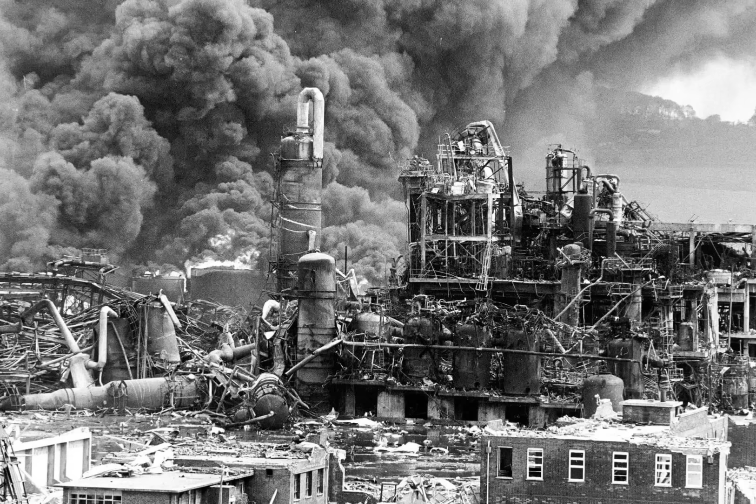Before that day, almost nobody outside of North Lincolnshire had ever heard of Flixborough, and nobody had any particular reason to. After it, the world of industrial engineering would never think about safety in quite the same way again, and the laws that protect workers and communities from industrial catastrophe across an entire continent would be rewritten from the ground up. To understand what happened at Flixborough, you first have to understand what Flixborough was.

And the answer, before June of 1974, was almost nothing. A village of around 500 people, sitting quietly on the floodplain of the River Trent in North Lincolnshire. The kind of place that does not appear on any national map of significance, that people from nearby towns would struggle to locate, that the Encyclopedia Britannica did not even see fit to mention. A flat, gray-green landscape of farmland and waterways, with the industrial silhouette of a Normanby Park steelworks rising in the distance. That steelworks is important because it is why the plant was there at all.

Since the late 1930s, a chemical facility had operated on the edge of this village, quietly producing fertilizers using gas drawn from the coke ovens of the steelworks next door. For decades, it was simply part of the landscape. Workers cycled to their shifts. The village lived alongside the faint chemical smell that occasionally drifted through on certain winds. Nobody thought very much about it.

In a photograph taken just before the disaster, a young woman can be seen walking her dog along the road that overlooked the plant. She is relaxed. It is a perfectly ordinary Saturday. That photograph would become one of the most powerful images at the disaster's memorial exhibition 50 years later, precisely because of how unremarkable it is.

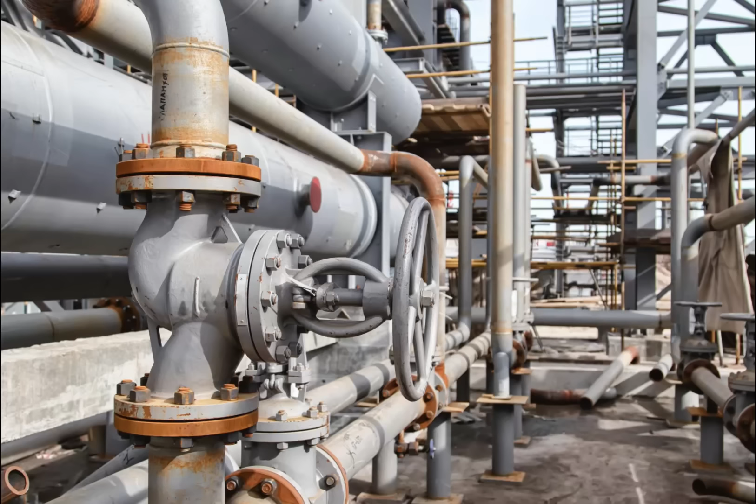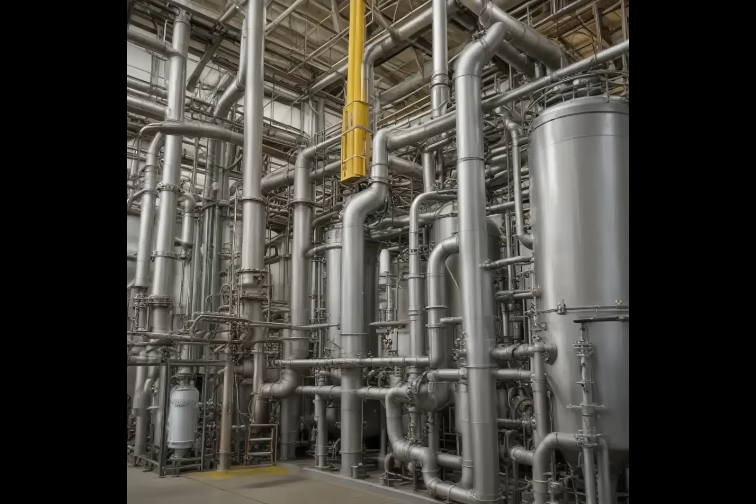The production process itself was not simple. By 1972, the plant had adopted a new method developed by Dutch State Mines in which a colorless, highly flammable liquid called cyclohexane was heated to around 155 degrees Celsius and pushed through a cascade of 6 large steel reactors under significant pressure. Each reactor was connected to the next by expansion joints called bellows, designed to absorb the thermal movement of the pipes as they heated and cooled. The cyclohexane was partially oxidized by compressed air as it moved through the system, eventually becoming the chemical compounds needed to produce caprolactam. It was a demanding, high-stakes process, running at high temperature and high pressure simultaneously, with a liquid that at atmospheric conditions would boil instantly and become a highly flammable vapor.

At the start of 1974, the plant was under enormous pressure from multiple directions at once. The British government had refused the company's request to raise the price of caprolactam, which meant the plant was operating at a financial loss with no relief in sight. A miners' strike the previous autumn had forced the government to restrict industrial electricity use to 3 days per week, and the plant had kept itself running by switching to its own backup generators rather than shut down.

And then, in the first weeks of the year, the plant's mechanical engineer handed in his resignation and left. No replacement was found. By the time disaster struck, months later, no one at the facility held a professional qualification in mechanical engineering. That absence would prove decisive.

On the 27th of March, 1974, a routine inspection found something that should have stopped everything. A valve on reactor number 5 was leaking cyclohexane, and it had been kept cool by workers spraying it with water. That water, combined with the intense heat of the reactor vessel, had caused a chemical reaction inside the steel wall itself. Stress corrosion cracking. By the following day, the crack in the reactor's side wall had already grown to 2 meters in length. The reactor was immediately shut down and removed from service.

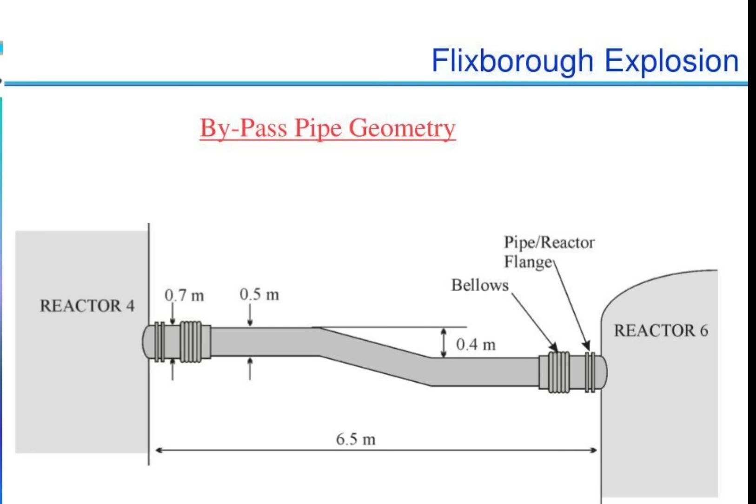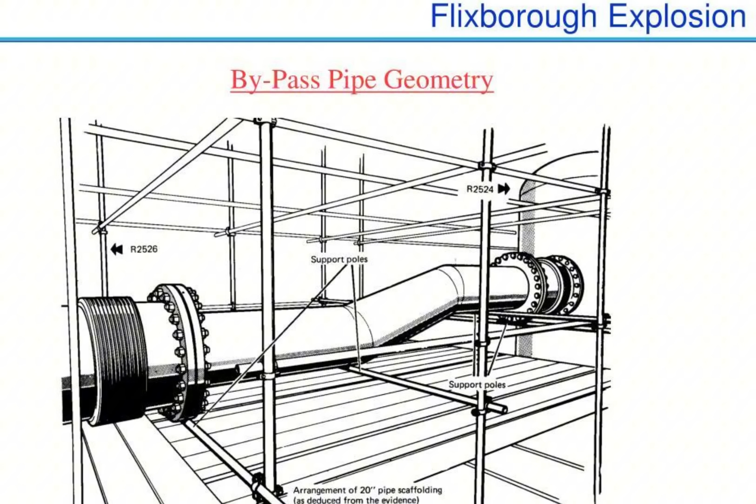The design meeting was held. No mechanical engineer was present. No specialist was called in from outside, though one was known to be available through another division of the company. The emphasis, as the subsequent inquiry would put it, was firmly on prompt restart. The bypass design was sketched out, and because of a specific problem with the layout of the reactors, that design had a complication. The 6 reactors sat on a slope, each one slightly lower than the previous, because the process used gravity to assist the flow of liquid. Reactor 4 and Reactor 6 were not at the same height. A straight pipe could not connect them. The bypass would need to include a bend, a dogleg, to accommodate that difference in level.

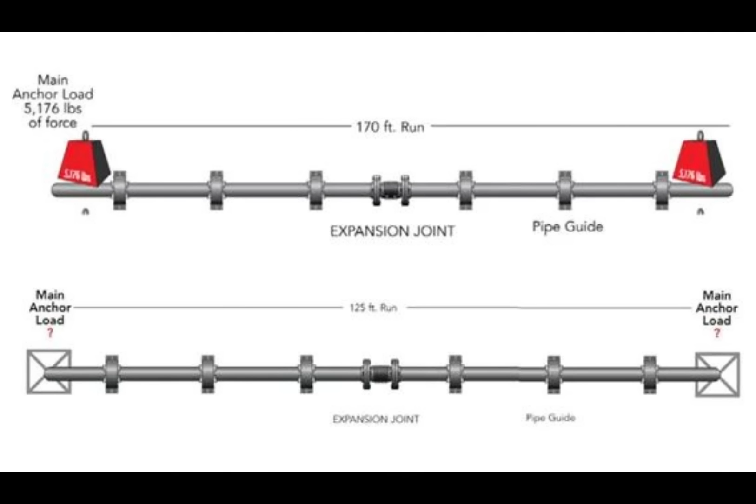There was another problem. The correct size of pipe for this application was 28 inches in diameter, to match the connecting flanges of the reactors. But there was no 28-inch pipe available on site. The engineers used what they had, a 20-inch pipe. To connect it to the 28-inch flanges of the reactors on either side, they needed reduction pieces. Each junction point was fitted with bellows, the same type of expansion joint used throughout the plant, designed to absorb movement. The whole assembly was mounted on temporary scaffolding poles. It was not anchored or supported from above. No detailed engineering drawings were produced. The layout of the dogleg was sketched on the workshop floor in chalk. No stress calculations were performed on the assembled structure. The bypass was not pressure tested before it was put into service.

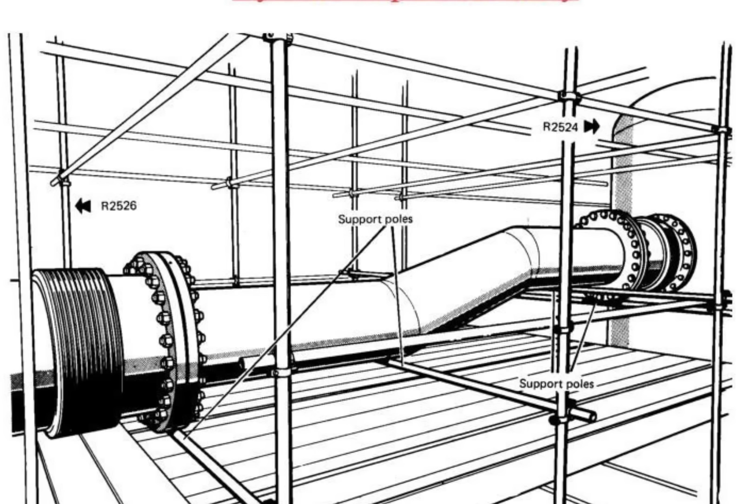What nobody calculated, because nobody on site had the specific mechanical training to think to calculate it, was the effect of the dogleg bend on the bellows. When pressurized liquid flows around a bend, it generates a lateral force. That force, in this configuration, will be transmitted directly into the bellows at either end of the bypass. The bellows were designed to absorb longitudinal movement along the axis of the pipe. They were not designed to withstand a twisting, rotational force applied at an angle. Under normal operating pressure, the bypass assembly was slowly being stressed in a way that its designers had not considered and could not see. The plant restarted. The weeks passed. The bypass held. And because it held, nobody questioned it.

Saturday, the 1st of June, 1974, was a warm and sunny day in Lincolnshire. Across the county, people were making the most of the early summer weather. In Scunthorpe, 3 miles from Flixborough, a television crew from the BBC and Yorkshire Television had set up their cameras to cover the Appleby Frodingham Works Gala, a local community event. Nobody there was thinking about the Nypro plant. Nobody anywhere was thinking about it. It was a Saturday. That fact mattered enormously.

On a weekday, the Nypro site employed around 550 people. The main office building would be full. Engineers would be moving between departments. Contractors and delivery drivers would be arriving. The walkways between buildings would have people on them. On a Saturday, with a skeleton crew of 72, large sections of the plant were empty. The main offices were deserted. The canteen was closed. It was the quietest it ever got. The plant was in the process of restarting after a brief shutdown. The cyclohexane was already in the system, already heated, already circulating through the bypass under what was called hot recycle, a preparatory phase before full production resumed. The liquid was at operating temperature and pressure.

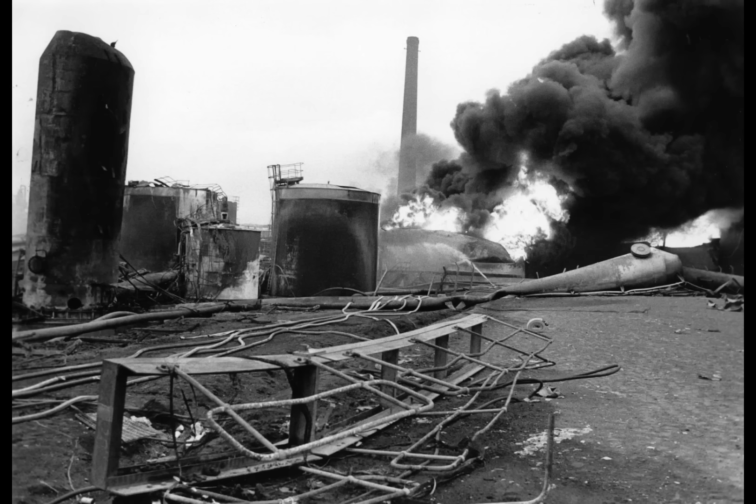The bypass had been carrying that load, day after day, for nearly 10 weeks. At 8 minutes to 5 in the afternoon, the bypass failed. The exact sequence of what happened in the seconds before the explosion would be debated for decades. What is known is that the bellows gave way. The dogleg assembly, subjected to weeks of twisting force at a level nobody had calculated, buckled.

In a matter of seconds, somewhere between 40 and 60 tons of superheated cyclohexane poured out of the ruptured pipe into the open air. At atmospheric pressure and at that temperature, it did not stay liquid. It flash evaporated instantly, expanding into an enormous, invisible cloud of flammable vapor that began spreading rapidly across the plant.

The cloud needed an ignition source. The Nypro site had many furnaces, steam systems, electrical equipment, vehicles. The vapor cloud reached one of them, almost certainly a furnace associated with a nearby hydrogen reformer plant, within seconds. What followed was an unconfined vapor cloud explosion, a detonation of a fuel-air mixture in open space, with no walls or containers to limit its force.

The yield has been estimated at the equivalent of between 15 and 45 tons of TNT. The entire reactor section of the plant was obliterated. The surrounding structures were destroyed. The shock wave radiated outward. One worker who survived described being thrown full length across the road by the blast, then lying still as debris and liquid rained down from the sky.

Another man who had finished his shift hours before heard the explosion from miles away and immediately drove to the station to report for duty. A firefighter 6 months into his career was at home on his day off when he heard the bang and stepped outside to see a vast column of black smoke rising over the Humber. He drove straight to the station.

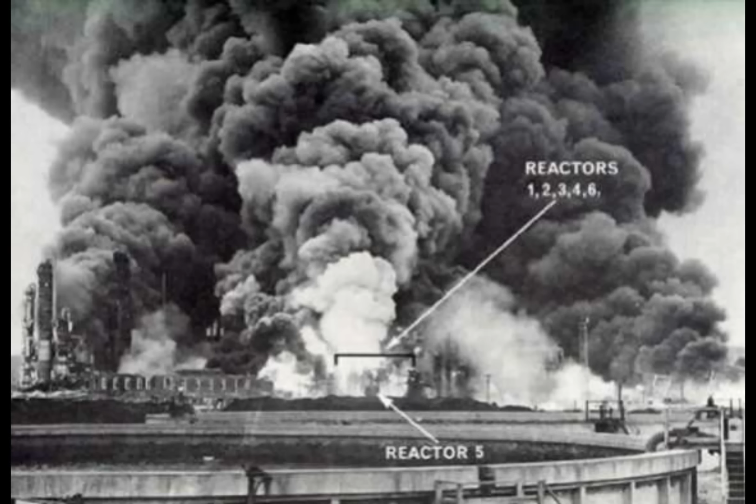9 more workers died in other parts of the plant. A delivery driver parked outside died of cardiac arrest. The fires that started in those first seconds burned for 10 days. By the end of that Saturday afternoon, 72 of the 79 houses in Flixborough village had been damaged. In the neighboring village of Amcotts, 73 of 77 homes were affected.

Nearly 800 buildings in Scunthorpe, 3 miles away, had broken windows or structural damage. Debris from the plant was found 6 kilometers from the site. Smaller pieces were recovered as far as 32 kilometers away on the outskirts of Hull. The blast had been heard in Grimsby and Hull, over 35 miles distant. Around 200 families were made homeless overnight.

The BBC and Yorkshire television crew who had been filming the gala in Scunthorpe captured the disaster on film. It was on the evening news that same night. Dave Roberts was 21 years old and 8 months into his training as a plant operator at Nypro. He had been scheduled to work that Saturday, but had taken annual leave to spend the day with his fiancée. Nearly 20 of the men who died were people he worked with every day. One of them was his best friend.

In the weeks that followed, he and other surviving workers were brought back to the site to help dig through the rubble alongside mine rescue teams. When a body was found, the workers were sent to a hut for a cup of tea while it was removed. That, he would later say, was the counseling available to them in 1974.

The British government moved quickly. Within weeks, the Secretary of State for Employment, Michael Foot, announced a formal court of inquiry into the disaster, to be chaired by a senior barrister named Roger Parker. It was the longest inquiry of its kind ever held in the United Kingdom. 70 days of formal hearings, stretching from September 1974 through to February 1975, with testimony from more than 170 witnesses.

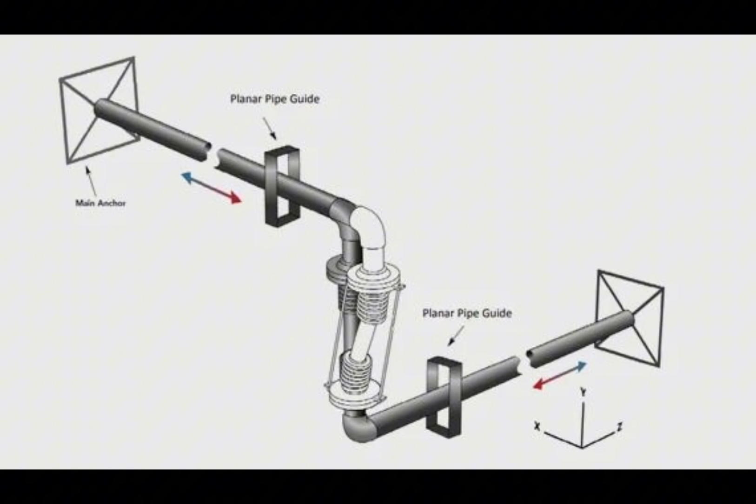The dogleg configuration of the bypass, combined with its reduced pipe diameter and the absence of any rigid upper support, meant that the bellows at the reactor 4 end of the assembly were subjected to a twisting, compressive force every time the system was under pressure. This is called bellows squirm. Over time, under repeated cycles of pressure, the bellows deformed. Eventually, they failed catastrophically, releasing the full contents of the pressurized system in seconds.

The force that caused the failure was not exotic or obscure, and that was perhaps the most disturbing finding of all. It was a straightforward principle of mechanical engineering. When pressurized fluid travels around a bend, it generates a lateral force that must be accounted for in the design of any joint or connection at that bend.

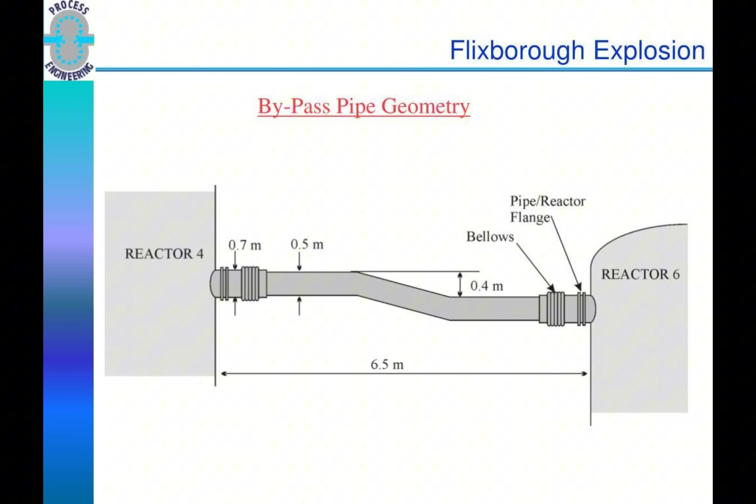The inquiry found that the engineering knowledge required to identify this risk existed, was taught in mechanical engineering programs, and was well understood in the profession. It simply was not present in the room on the day the bypass was approved. Nobody had called for outside advice. The man who would have known to raise the question was gone, and the gap his departure left had never been formally acknowledged or addressed.

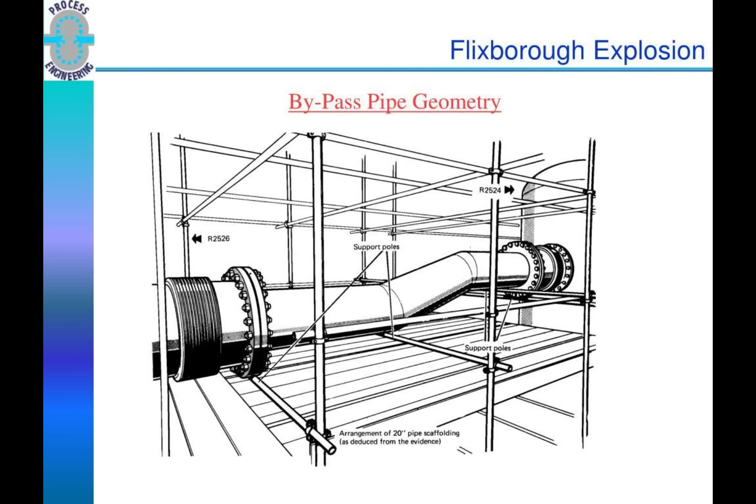The inquiry also delivered a verdict on the control room that went beyond the physical facts already visible in the wreckage. It was not just that the building had been poorly placed or poorly built, though both were true. The deeper finding was that prior to Flixborough, the risk of an unconfined vapor cloud explosion on this scale had simply not been incorporated into any standard guidance for the design or location of occupied buildings at chemical plants.

Nobody had required plant designers to model what would happen to a brick structure under explosive overpressure, because nobody had made it a condition of operating a facility of this type. The control room at Nypro was built the way control rooms everywhere were built, and that was precisely the problem.

The inquiry was careful in one important respect. It explicitly declined to attribute criminal blame. Its conclusion was that no one at Nypro had knowingly and deliberately accepted a hazardous course of action in disregard of safety. What it found instead was a systemic failure of judgment at every level, from the decision not to call in a mechanical engineer, to the absence of drawings, to the lack of pressure testing, to the broader culture in which production pressure consistently shaped engineering decisions.

The disaster, the report stated, was caused by the introduction into a well-designed and well-constructed plant of a modification that destroyed its integrity. But the inquiry also raised a question it could not fully answer within its own scope, and it is perhaps the most troubling question of all.

At the time of the explosion, the processes used to control and approve hazardous chemical plants in the United Kingdom were startlingly weak. Local planning committees, with no technical expertise in industrial chemistry, granted permission for facilities to operate with large inventories of dangerous substances. Once built, those facilities were subject to no ongoing mandatory safety review by any national body. Nobody had mapped how many other plants across Britain were operating with similar vulnerabilities. The honest answer, as several experts noted in the aftermath, was that nobody knew.

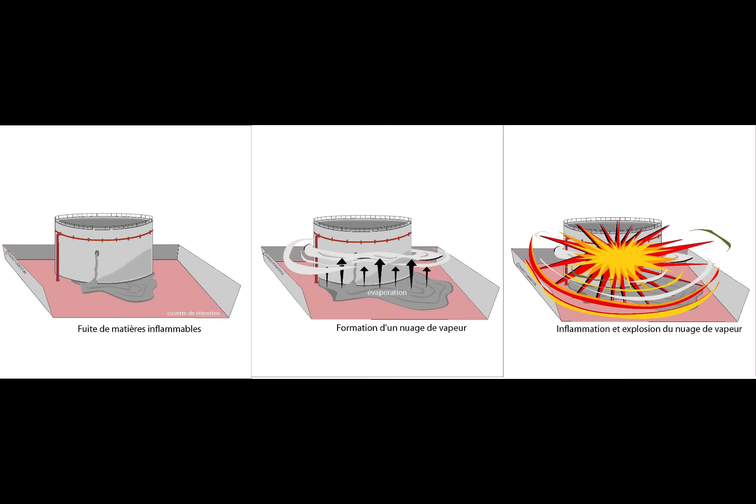The aftermath of Flixborough moved through British society in two distinct waves. The first was immediate and emotional. A country shocked by the sight of a modern industrial plant reduced to rubble on a peaceful Saturday afternoon, with lives erased in seconds by something that had been presented as a temporary plumbing modification. The second wave was slower, more institutional, and ultimately more consequential. It reshaped the framework of industrial safety not just in Britain, but across an entire continent.

The Health and Safety at Work Act had been moving through Parliament when the explosion occurred. It was passed later that same year, and several of its provisions were directly sharpened by the Flixborough disaster. For the first time in British law, employers at high-hazard facilities were held to a general duty to reduce risks to workers and to the public as far as was reasonably practicable.

The old system of specific prescriptive regulations that covered boilers but not cyclohexane, that applied to steam but not to vapor clouds, was no longer adequate. The new law placed the burden of identifying and managing hazards on the people best placed to understand them, the operators themselves. The Health and Safety Executive was established as the independent national regulator for workplace safety.

The Advisory Committee on Major Hazards was set up almost immediately after the disaster, tasked with identifying which types of industrial installations posed the greatest risk and recommending appropriate controls. Between 1976 and 1984, this committee produced 3 landmark reports that defined what it meant to manage a major hazard site responsibly. They introduced the concept of formal hazard assessment, the systematic identification and quantification of risk before anything is built or changed. They required operators to think through not just what might go wrong, but how bad it would be if it did.